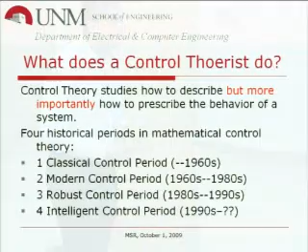So having this baggage and background, what does a control theorist do? What is control theory? What is it exactly? When you're trying to do control, as opposed to being a mathematician or a physicist, what you're trying to do is you're trying to prescribe a behavior to a system.

And the difference between that and, let's say, somebody who's doing signal processing or communications is a signal processing person will take a signal and they will say, well, look, I know there's something buried in there. I'm going to massage that signal to get the image out of it or the information out of it. A controls person does not care about that signal in particular. What he or she will care about is how to take that signal and then modify the behavior of the system.

The example I like to give my students is you're flying an airplane and it's measuring 5,000 feet when it should be 10,000 feet. Well, the signal processing person will say, well, I'm just going to add 5,000. It's 10,000 feet. The control theorist will say, no. If it's at 5,000 feet, I need to do something about it to move it.

So they will take this signal. They cannot go back and change the airplane. They cannot throw luggage off the plane to say, okay, now we can go for the same power at a higher elevation. That's not how they can do it. Without going inside the system, they're going to measure things from the output and then change the input in such a way that the behavior of that closed loop is exactly what you want. That's really the idea.

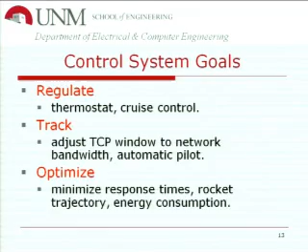You can regulate. In this room, I want it at 71 degrees—I'm regulating. You can track. In an airplane, I'm tracking a trajectory: I'm going up at some speed, then leveling off, and then going down. These are the standard goals.

You have other secondary goals, and then you have the question of optimizing. Because once you do that, you can do it in a very inefficient way, or you can do it efficiently. Optimize means, okay, if I want to launch something from here to, say, Mars, I want to do it at a good time. I don't want to waste too much fuel, because if I put too much fuel, then I can't put instruments on it, and so on.

So you want to optimize something. Energy consumption is usually a good one for some of the applications you guys are involved in. So you will have things like: you want some quality of service, you want to guarantee a certain throughput, certain performance, but you also want to optimize the cost or the energy consumed.

All right, so where do you start? Well, you start again with the model. So I want to go back and drill into this a little bit, and then jump to some of the applications. As I mentioned before, usually it's a mathematical description. Usually—it may not be for you, because you cannot write down a physical law that says if I do this, here's what's going to happen to all of these variables.

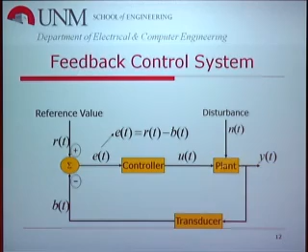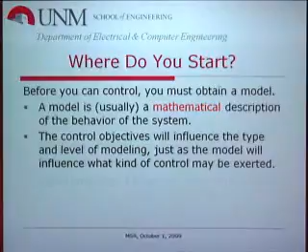In some cases, I can. In an airplane, I know a lot of how I can do this. In a computing application, I really know very little about - even if I have access to this, I know very little of what happens in between. So what do I do? Instead of a mathematical model, I'm going to have to do some curve or data-driven model. Let me step back and talk about some models, because people use the word linear a lot in applications.

In the context of control, linear means one thing: it obeys superposition. All it means is that if you double the input, the output will double. If you add two inputs, the outputs will add. If it obeys that, it's linear. If it doesn't obey that, it's nonlinear.

Everything is nonlinear. There's nothing that's truly linear, except in a small regime, because even the simplest thing will go nonlinear on you if you push it across its regime of operation. I don't care what it is - everything eventually is going to either saturate, burn, or do something. There's nothing that's linear from zero input to infinity input, because that would mean you have an infinite frequency response that will take in any input.

It doesn't do that. Your car, when you're driving, your steering input can go between some angles - you cannot go all the way 360 degrees. You can't do it. You cannot push it past a certain limit. It's going to saturate, it's going to burn, it's going to do something. But linear turns out to be a great approximation in the regime where we're normally interested.

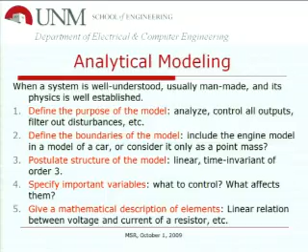The couple of things I want to say is that you want to apply characteristic inputs to the system. For machine learning, what you learn is highly dependent on the assumption that you're operating in the regime where your system or classifier is going to be valid. So you want to apply characteristic inputs to the system. When you're flying your plane, you would not apply an input that has the plane always flying sideways - it's not characteristic. You apply inputs that the system is actually going to see, and then you want to go across.

Here's an interesting example: it turns out that the best thing you can do if the system is stable is to apply white noise. Why white noise? Because it has all frequencies - it excites everything, and you can see it. That's why in system identification you want to apply inputs across the frequency spectrum. In practice, you would not dare do that on a system that's a black box, because you don't know what frequencies you're going to excite. But that would be a sufficiently rich input to apply to the system to get things out.

Now you collect the input-output data and postulate the model - this is very key. You postulate a model, starting by saying, okay, I have some idea what the model is. Is it going to be a linear system? Probably, because we have a lot of tools for that. Can I make it second order? Let's start with second order and see what it does. If it doesn't work, maybe go to third order. Maybe I missed it completely, and I should make it nonlinear - neural networks or basis function type things. That's how you get a model that is not physics-based. The actual system may be a first-order linear model, but your model, for the inputs you applied, may be a 10th-order nonlinear model that explains exactly what's happening. So the point is it's very key to postulate a correct model that's as simple as possible, and then try to get the best fit.

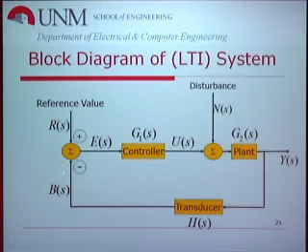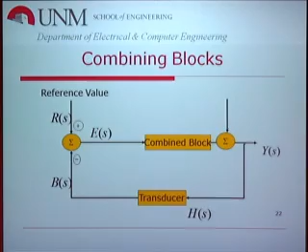So everything here is in the S domain, and what happens in the S domain is you can do block diagram algebra. You can combine things. Oops. You can combine things. This is missing something in here, but this combined block, you can multiply these two together. In fact, you start now looking at important transfer functions, and you can say things about the system by looking at the transfer function.

For example, I will know that my closed loop system is stable from this reference to this output, from R to Y, if the zeros of the polynomial that happens to be here, or the poles of the system, are in the left half plane, or in discrete time they will be within the unit circle. I will know that. I don't have to test anything. This is correct. This is it.

So what my job ends up being is figuring out what G1 of S should be to place the poles or the zeros of this down here in the left half plane. That's the design, which then I go to a software like MATLAB, and I plug in what this is, I plug in what this is, I tell it what the reference is, what I want to do, and then boom, it will spit out a controller for me that will satisfy this thing.

I have to tell it if it's just a constant, a P controller, a proportional, it will do that. If I put a PI, it will do something. If I put a PID, I can design at this point very, I wouldn't say it's just a straight trajectory except for the P controller, but undergraduates can do that. They deal with it very easily, assuming this plant is not too complicated. If it's too complicated, I can do numerical things, but I can solve it.

That's it. Now, this would be the end of the story if it were not for the fact that you can't get everything. Remember, if it's too good to be true, it's too good to be true. I can start from the beginning and I say, I know I can stabilize this system. And I can stabilize any system you give me by looking at the plant. By looking at this, I can stabilize it.

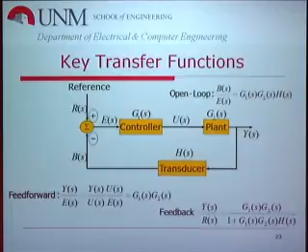Well, as soon as I say I want to fix the structure, the problem is unsolvable. This is where quantifier elimination came in and said, oh, well, you can find an answer to this. But as soon as I said, don't give me the answer that the mathematics are telling you is the answer, but give me the answer of this order, open problem. In fact, not just open, but provably undecidable.

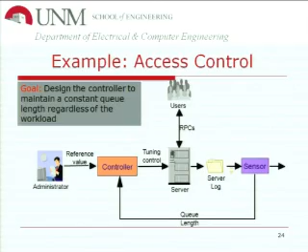And this gets back to my link with the control theory, with the computation, theory of computing and so on. So even in the simple case like this, which is a scalar system and linear time invariant, it's a mess.

Let's set this aside for a second and show you that this is what people have been doing. So this is actually an access control. I think this is a Lotus Notes server. I don't know if this is Hellerstein work or one of the other people, but basically, taken from one of the available references online. What they're trying to do is design a controller to maintain the constant queue length regardless of how many people are trying to get in.

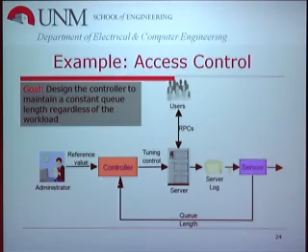So you can accept them or not accept them depending on this queue length, which is what you're trying to control, where you have the reference value in here. You see that the structure is the same. The sensor is what I called before the H of S, the transducer. This is really the system, the plant, and this is the controller. Slight abuse of notation here with the arrows and so on.

Okay, so what you do is you write down their transfer functions, and people have done that. Now you see the z variable here because it's in discrete time now, so rather than differential equations, they wrote down difference equations. They put them together. Now what you can do is find this G of z. You have equations for them. You either identified some of the parameters, or you find the G of z. And here, you try different things that the model will tell you.

Okay? So if it doesn't depend on anything, if the current value of the output is the same as the current value of the input, that's static. If you have one delay or one memory, the current value of the output depends on the current input, but also potentially on my previous output. So my queue length depends on what it was before, as well as on what I'm putting in right now. Or two of them, meaning I remember two of them. That's what will be a second order.

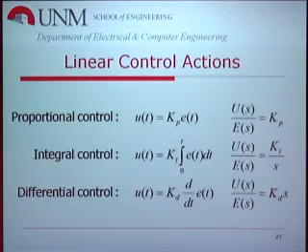And then the differential control, which is a derivative in here, basically, this is what effectively it is. It's really predicting if you are trying to do something in discrete time. And if you put them together, you get the P, the I, and the D, or the PID. The proportional basically provides stability and handles uncertainty.

So if you don't know anything, just take the output, subtract it from the reference input, and multiply it by something very small. Start out very small, and then slowly and slightly turn it up. You will see the behavior of the system change. Now, unless you're super unlucky, it'll probably get better for a while, and then it will get worse.

Now, you could be super unlucky because you may be on the margin, or you may be putting in the wrong sign of the controller. And this is what most people do. That's what they do in these controllers at home. This is feedback. This is the thing that I ask you a question. Based on your answer, I adjust. I yell, or I smile, or whatever. This is all I'm doing.

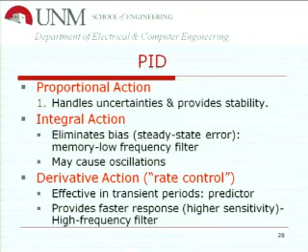Okay? And really, it's a low-frequency filter. So basically, it cuts out the high-frequency changes. That eliminates them. Problem is, if you put too much of it, because it looks like something over S, the S is the pole, which happens to be right on the j omega axis, and it could cause oscillations for you if it's too high.

The derivative, which also is known as rate control, is really effective in the transient part, and it's really a high-frequency filter. It actually starts out small, and then it goes high, so it amplifies things at the high frequency, which is bad if you have a lot of changes. In fact, if you have noise, you never want to use this, and you always have noise, right?

Because anytime you have the noise and you differentiate it, something is going fast, so the slope becomes part of the input, and if the slope is high, then you get yourself in trouble. But this is why you would use a PID. You put it in here, and then you have exact ways to try to do it.

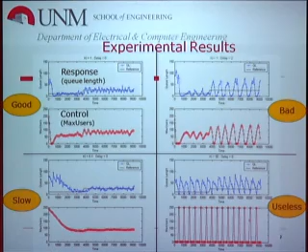So this is one where the Ki got to be, well, it's the same, but the delay here is what's killing you. Same thing here. You have too high of a gain. Remember, I told you the integral term, you shouldn't have it too high. Boom, you get the oscillations and so on.

That was his master's thesis, where we were doing distributed load balancing, trying to control the load for a lot of computing nodes. And we had delays, which was the interesting twist in here, because a lot of the load balancing is done on one machine. This was supposed to be done across for an application that the FBI had for databases that were spread across the United States or the world.

This is something that's catching a lot of attention these days, where you have to try distributed control for sensor networks. Either you're trying to distribute the sensors some places to be able to collect information, or other reasons why you would want to distribute the control.

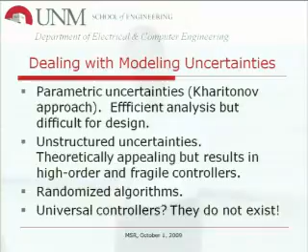Okay, remember I told you the model. Well, what I should have told you is model the uncertainty as well as the model. So it's good enough to say, okay, look, I can nail this model, but most of the time, you don't want to nail the model. You don't want to say exactly what the model is, because it gets too complicated. Instead, what you probably want to do is look at a model that is nominal, that fits most of your cases, and then model the uncertainty, model the family of systems. And you get different ways to do this.

There was a very interesting work in the 80s to deal with parametric uncertainties, i.e., I know what the system is, and we're talking linear systems for the time being, although parametric uncertainties can handle more than linear systems, but let's talk linear. So I know what the system is. I know that there is a numerator over a denominator of a certain order, but I don't know the values of the parameters in that system.

Well, it turns out that this gentleman, who was a young researcher in the former Soviet Union, had solved this problem in an obscure mathematical journal that nobody knew about. 5-10 years later, it appeared in some of the Western literature, and for about 10 years, people were doing this work, trying to study systems that had parametric uncertainties.

It turns out it's very efficient for analysis, but really difficult for design, exactly because of the problem I mentioned before, which is you have to fix the order of the compensator. You have to say it's a second order or a PID, and then it becomes extremely difficult to do design. Okay? The solution to that turns out to use randomized algorithms, which is what we've done for a long time, and it was very successful, to get around the computational complexity.

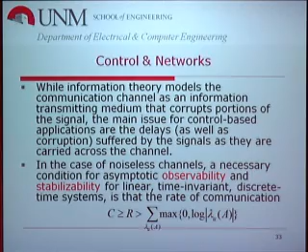But now you're going across this noiseless channel, and it turns out the rate that you communicate across has to be larger than the sum of the unstable eigenvalues of the system. What does that mean? Normally, I don't care about this because I'm communicating at infinite precision and infinite speed. But in reality, once you start communicating across a channel, your information is going to be packetized, and we're not even talking about that yet. Even if you can send everything exactly, you have to have a rate higher than how unstable the system is.

Let me give you an example. You're driving your car, and you stayed up late working on the latest project that has to go out in a couple of days. You get up the next morning tired, go out of your driveway, and you doze off a little bit. You wake up, you're okay in the driveway because you're not going too fast. The system dynamics are unstable, but not too fast. So the rate that you have to pay attention to in order to apply the control is small.

You're driving on the highway, you do that, you're gone, right? Because the system is highly unstable. You have to pay constant attention, you cannot be texting. So that's what this is making formal, and it's one of those fundamental laws. Everything we were doing up to that point assumed the channel has infinite capacity. It doesn't, but for all practical purposes we had a dedicated channel. Now that we have to control things or send messages across the network, that's not the case.

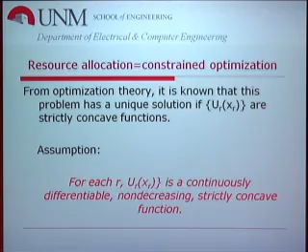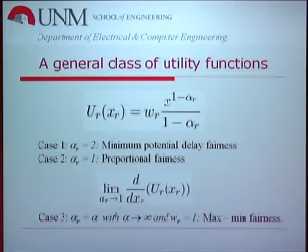It's not exactly what's happening, but this explains it. These are some classes of utility functions that give you the minimum potential delay, or proportional fairness, and so on. So basically, by defining these things, you end up with different congestion control algorithms.

Now here's the problem with this. All of this up to that point assumes you have this supervisor, this hypervisor, controlling everything. That's not what happens when you put a node on the network. Nobody knows about everything. So what do you need? You need feedback. And this is what happens.

Really what happens here, these are sources and these are links. You want to design the dynamics so that the sources are not supposed to know about everything about everyone else. Each source is going to know, for example, that my message got there or it didn't get there. That's all it needs to know. The links do not care about the particular sources or about what other links are doing. All they need to know is that I'm getting more traffic than my capacity, than what I can handle.

So they're getting feedback, but it's going to be implemented in a distributed way. Let me get to the punchline. There's a primal dual algorithm doing an optimization, one algorithm doing two optimizations that are maximizing the utility of everybody in a distributed fashion, where each node, the sources or the links, are getting just enough information to solve that problem in a distributed way.

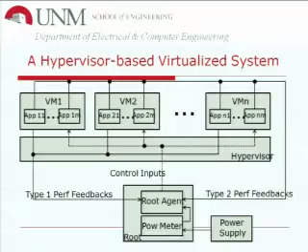The final one here is actually work, a couple of slides from a student we had here in the summer who worked with one of your groups to look at designing controllers for some of your data centers and so on.

This is really the steps I talked to you about. You take the system, which is right here someplace. You decide what the control inputs are. You try to fit a model - what is the control input, what are the outputs. You try to fit a model to this system. You identify, using least squares and so on, the parameters of your model. You end up with something like this.

So this is a multi-input, multi-output system versus single input, single output. But that's really what they did. They came up with signals they can measure and use for feedback. There are some things that are disturbances they cannot adjust, and there is also noise. Once they have this model, they actually designed the controller.

My understanding is they tested it on a small scale system and it worked beautifully. Or, well, I don't know how well - I don't know if it's full scale and so on. But basically, once you have the system in this configuration, he's using the model to design the controller, but then applying it to the actual system. There's a variety of things to do, for example, to adjust the model online if things are not happening as expected.

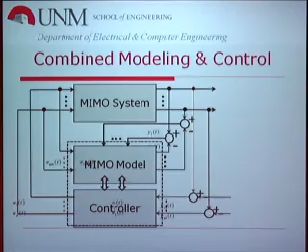The previous one looks like an observer, but the observer is missing. Which one, this one? This is like model following control. But you're right, if you were able to estimate the state, that would be an observer. What happened in this case, it turns out this system didn't have any dynamics, it was a static system, so they didn't really need that. But you're right, you're thinking the right way to get the observer to construct the state and feed that. So let me talk about some of the other control issues you may run into, or some of the tools.

Most systems are nonlinear. All I mentioned about nonlinear is global asymptotic stability. But for nonlinear systems, for a while, all we would do is linearize and say okay, we're going to apply linear techniques and stay in the linear regime.

Since the 80s, 90s, and so on, and since discovering what people did in the 1900s, we understand a lot more about nonlinear systems. So we don't need to linearize to hit everything with linear techniques, although linear controllers work on many of these systems.

So this is really, if I had to get something out, most systems are uncertain by design, because they're either too complicated, or you don't want to model them as accurately as you can because it may not pay off. So if you model the uncertainty, you may be able to do a lot of things.

First principle modeling is very difficult computing-wise. In fact, I'm not aware of any work that says, okay, you put this in, this is what you get out, like Newton's law of something. There's nothing like that. So you have to use data-driven techniques to do the modeling.

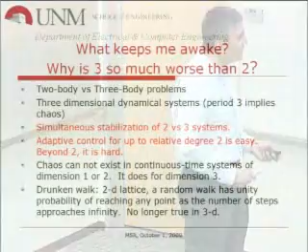But every time I give a talk to some new audience, I want to present this question because it really bothers me a lot that in a lot of my problems, I can solve everything for two systems or two nodes or two of something. I go to three and all hell breaks loose. I have no idea why that is.

So if you have examples of that, let me have them. But if you don't, if you want to think about it, these two in here are in control. We can simultaneously stabilize two systems. I can take two systems and I can tell you whether I can design one controller that will stabilize both of these at the same time. One controller, it doesn't change, it's not an adaptive controller. So if you have two operating points, two operating conditions, I can design one controller. I'm talking linear time invariant simple systems.

Three systems, no idea. No idea. I mean, it's actually provably undecidable. It's translatable to the other one, this other one here, adaptive control, where you try to adapt to the system. If you do adaptive control for two systems, it's easy. When you go to three, all hell breaks loose. It turns out to be okay, actually. You can solve it, but it's really so much more complicated. So I don't know. This just has nothing to do with the talk. I just want to see.

Well, I figured I'm going to talk to some smart people, so if you want to think about them, let me know. This is interesting, the drunken walk in a 2D lattice. I told this to one of my advisors, and he said, I know exactly what you're talking about. And he started rattling, and he said this is one of his problems: in a 2D lattice, if you do a random walk, you have a 100% probability you're going to reach every point, including the starting point here. That doesn't happen in 3D. So if you know something about it, let me know. Point me to some place.